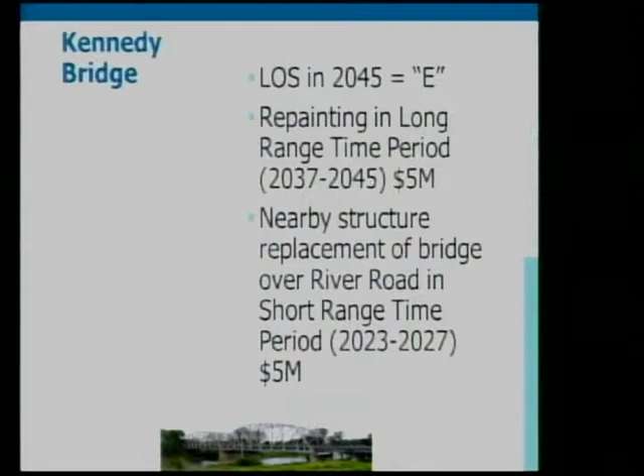We do have a nearby structure to the Kennedy, in East Grand Forks. If you drive over the Kennedy Bridge into East Grand Forks, there's the interchange with River Road, 4th Street. That bridge is scheduled for total replacement, projected to happen around 2026. That's also a $5 million replacement cost, with revenue identified and prioritized for it, so that project should happen given all other things remain the same.

The recent project done there made the decision not to add capacity, just to rehab, which left us with some capacity issues on that corridor. We're currently studying Gateway Drive, or US 2, specifically on the North Dakota side, because our traffic volumes are having issues there today, and projecting into the future, the capacity isn't there to meet demand. So on the Kennedy Bridge, even though the bridge itself will stay as it is, the roadways leading up to it on both sides have capacity issues today and will in the future. Tomorrow in this room, if you want to learn more about Gateway Drive, there's an open house specific to that study, at this same time, right here in this place.

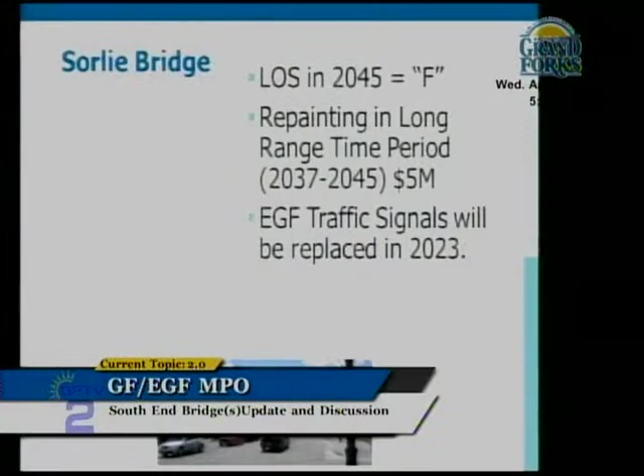For the Sorlie Bridge, or the downtown bridge, it also recently had a project done. There was an extensive review of the structure, and in the end, we actually had money programmed to replace it, but they decided all it needed was basic repainting and some minor work. That decision allows us not to revisit that structure for a long time. At the end of our 2045 timeframe, we have another similar project to the Kennedy Bridge occurring on the Sorlie Bridge — same project, same pricing, with money identified and set aside. We also have in East Grand Forks, in the future, total replacement of the traffic signals in downtown East Grand Forks, a project that will affect the Sorlie Bridge.

We know starting in May, Demers Avenue in Grand Forks will be totally reconstructed. The decision on that reconstruction was just to put back in place the capacity that's there today.

So both the Sorlie Bridge decision to just repaint and the Demers decision to just reconstruct what's there leaves us with capacity concerns, not just today, but more so into the future.

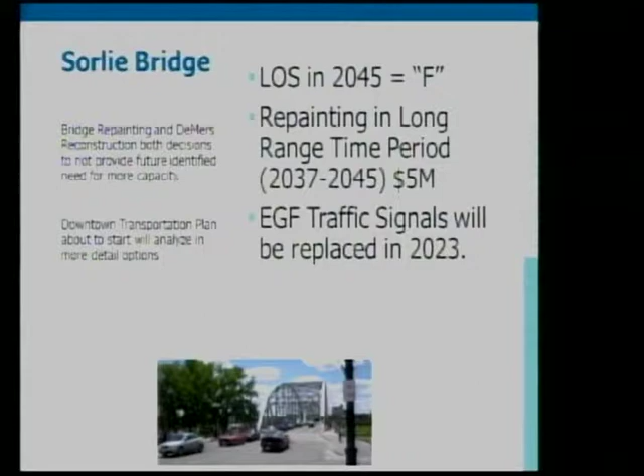The MPO is about to start a downtown transportation plan to help resolve those issues, and also work with the traffic signal replacement in East Grand Forks to help make the whole corridor of Demers Avenue in Grand Forks and East Grand Forks operate better.

The Point Bridge: more than 10 years ago, 14 years ago now, a decision was made to just basically repaint the Point Bridge and maintain it at the capacity that it provides. In the near term, there's another repainting job programmed in the plan to keep that bridge operational.

Back in that 2006 repainting project, they didn't have to do a traffic operations report for that type of project, but it did identify as one of the alternatives a replacement option. They didn't pursue that, but if they had pursued replacement, it would have meant added capacity would have had to be built to meet future demand.

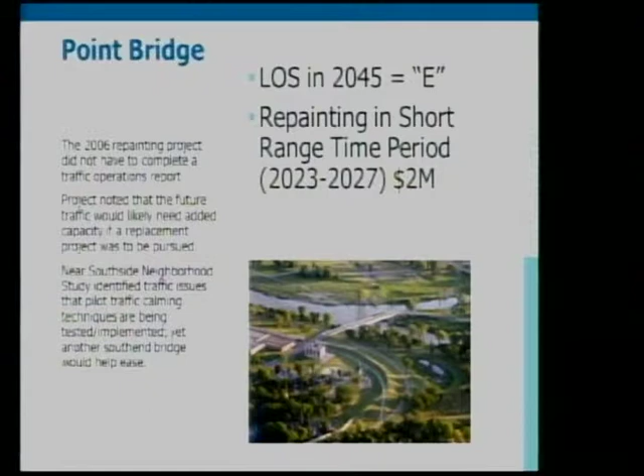That obviously didn't happen, and because there isn't another bridge to the south, the near south side neighborhood here in Grand Forks has been asking the city, and we've been working with the city on doing some traffic calming techniques, as you've seen on Reeves Drive in particular. While we can identify some benefits to the near south neighborhood with these techniques, another south end bridge would help much more for that neighborhood.

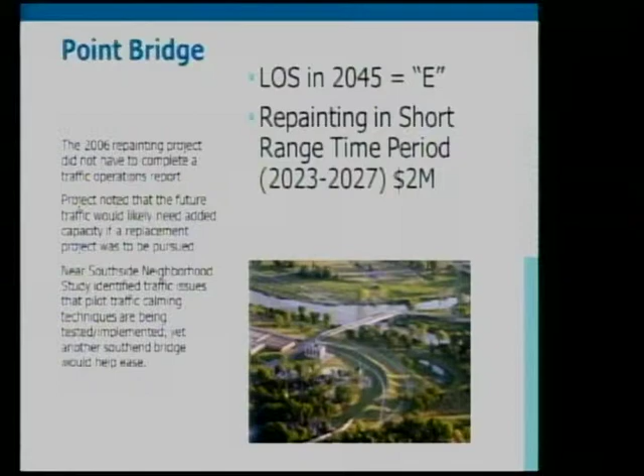So that's what's going on with the existing three structures. Even though we're not doing anything to add capacity to them, we've had projects recently done on them. We've also identified that there are capacity issues leading to and from all three of those bridges.

And we have started studies for the Kennedy and the Sorlie. For the Point Bridge, and the reason most of you are here, is that we felt the need to site another location to the south. Before I get to that, there is one project that we identified that we could not find funding for in the current plan, and that is on the Point Bridge.

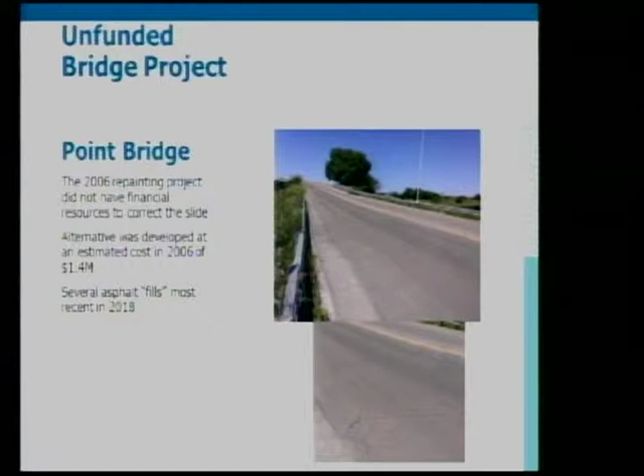At that time, it was $1.4 million, but there were no funds to do the project. So since then, they've been putting in asphalt fill to make that bump less noticeable, just last year they put in that fill again. But it is an unfunded project, meaning we identified the need, but we couldn't find revenue for it. And it's escalated now to about $4 million because of inflation.

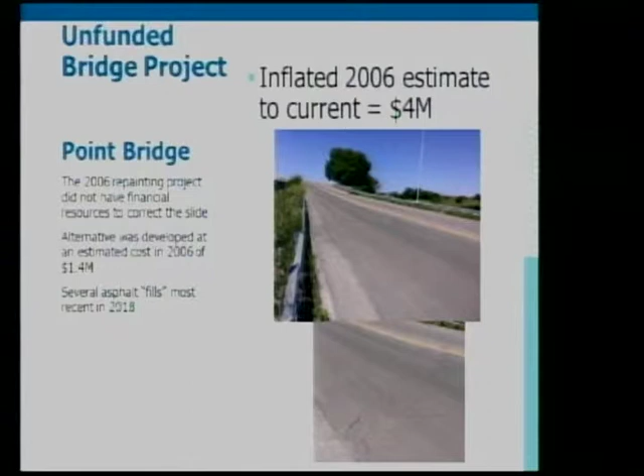So for the future river corridors, we have Appendix C in our documentation. It's a 171-page report that talks about how we went through the process of identifying if there were south end bridge locations, where we should study them, and what the data would tell us. I won't go through the whole 171-page report, but I will highlight some of the things that we did to come to the conclusions we did.

The first point is basically what I just told you: there are some existing issues on all 3 river crossings. In the future, they don't get better, they get worse without another south end bridge.

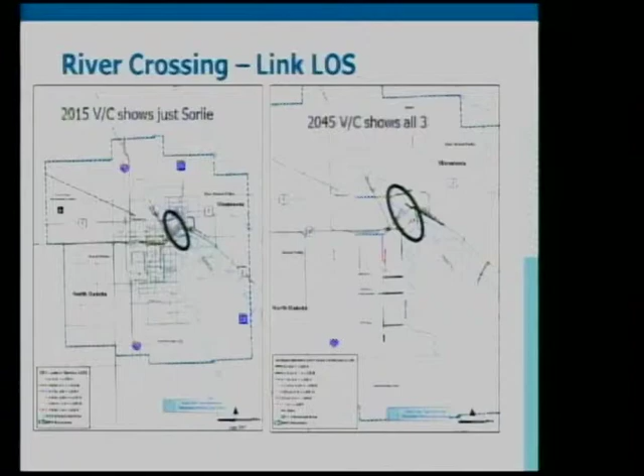This slide gives you level of service, hopefully we're all familiar with that, where we give roadways and intersections a letter grade just like you got in school. A is great, F is failing. You can see here that in 2045 we've got some intersections that are failing without that additional bridge, and some intersections at level E, which is also considered a failing grade.

Without another bridge, we identified what could be done, particularly at the 2 intersections that are F: Belmont and 4th Avenue, and Belmont and 32nd Avenue. So regardless of a bridge, we need to do traffic control improvements at those 2 intersections to solve the future traffic demand.

How do you get an F rating? Is that just because it's a 4-way stop and not a traffic light? Yeah, a 4-way stop can only handle so much traffic. And as you increase the cars, you have to go to a different traffic control.

Earl, I'm sure this is obvious, I just have to ask it though. If Belmont and 4th is rated an F, what's the rationale, in a sentence or two, why they would have taken the traffic light out at that intersection and made it a stop sign? Is that flow of traffic? Well, what happened with that traffic signal is somebody ran over one of the standards, and then ran over two of the standards.

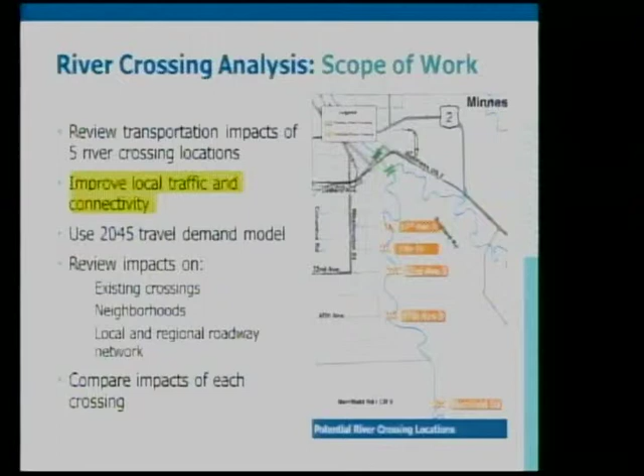We started out initially just looking at 17th Avenue. It was called 24th Avenue initially, but we more precisely picked Elks Drive. If you don't know where Elks Drive is, it's near 24th Avenue South, 32nd Avenue, 47th Avenue, and Merrifield Road. These are all Grand Forks reference locations, because over in Minnesota there just aren't roads necessarily on the other side.

How did we think these bridges would look? Again, because they're serving local traffic, we modeled the Point Bridge as a bridge of similar characteristics. You'll notice there's one lane in each direction. When the Point Bridge was built, they didn't have design standards that required shoulders, so we would now have to show shoulders. When the Point Bridge was built, they also didn't have the demand or requirement of a multi-use access point, so we modeled that.

So this is a cross-section of what the bridges for all 5 locations were, making sure we were doing an apples-to-apples comparison on all locations. The other thing we did to make sure it served local traffic is that we only connected to the nearest north-south roadway in either city. We did not add any new connections to I-29 to the west or to US 2 east of East Grand Forks.

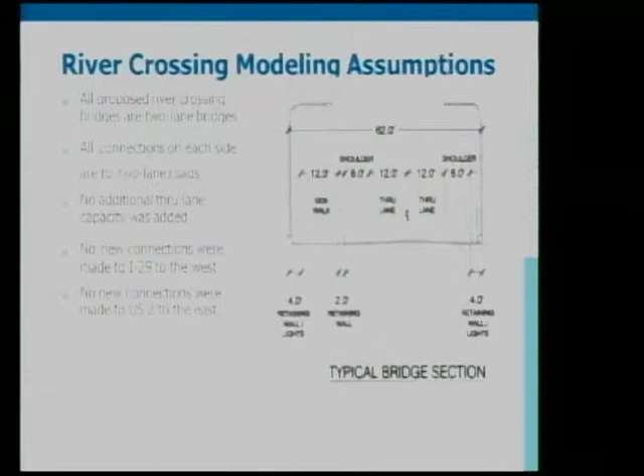Because again, our mission was to find a location that served that local traffic need. We have a traffic demand model that we use as one of our tools to help identify not only what traffic issues exist today, but from the federal, state, and local government points of view, we want to make sure what we invest in today solves today's problem but also lasts at least 20 years into the future.

So we have to forecast what we think traffic will be in 2045 in this case. Using our travel demand model, we identify what the traffic is today, that's the top number. The middle number is 2045 without another bridge to the south. The bottom number is what the traffic changes to if we build one to the south. This shows 32nd Avenue, and we've located a few key points in the network showing how we predict traffic will change if we did a bridge here. We did this analysis for all 5 sites.

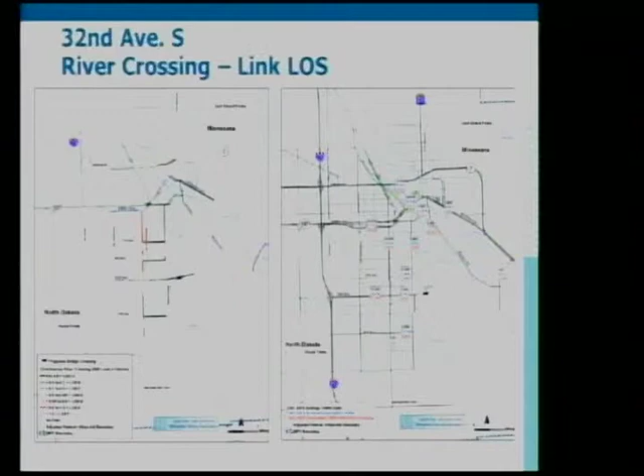So to try to give some idea of what that local traffic impact is versus what a regional traffic attraction that bridge might be, we initially chose 2 points. The first is out here on the Mallory Bridge over the Red Lake River east of East Grand Forks, which gave us some sense of the regional traffic pull. We also looked at traffic on Bygland Road in East Grand Forks.

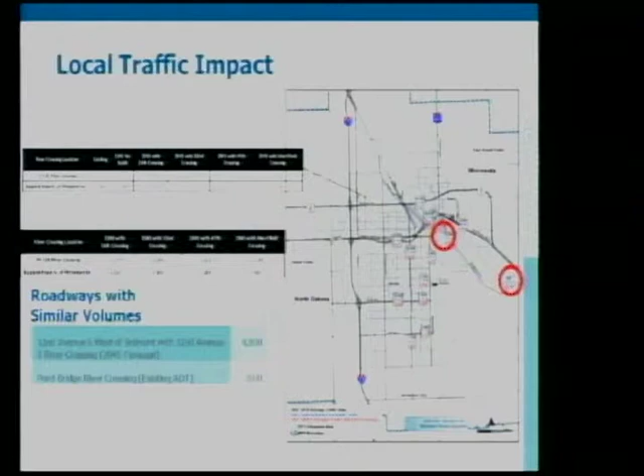This slide shows, in our model, we do what's called a select link. So when we put a bridge, this happens to be the Elks Drive Bridge, we ask the model to track every vehicle that crosses it, tell us where it came from or where it's going. We compared it versus the other model, showing us where traffic was taken away from. With a new bridge, it attracts traffic that already exists in the model, so the model can tell us where that traffic is coming from.

The reason I put this example up is that on the North Dakota side, it enters a T intersection, and the traffic gets split amongst several neighborhoods. The red shows that Park Drive would have an increase in traffic in front of its houses with the bridge at Elks. 17th or 24th Avenue would as well, and 32nd Avenue would as well.

Belmont Road would, and a small segment of 17th or 13th Avenue would. All the other crossings, because they went directly into an arterial roadway, stayed on that arterial roadway. But this was one example, trying to show you that our model was able to give us some sense of where traffic was coming.

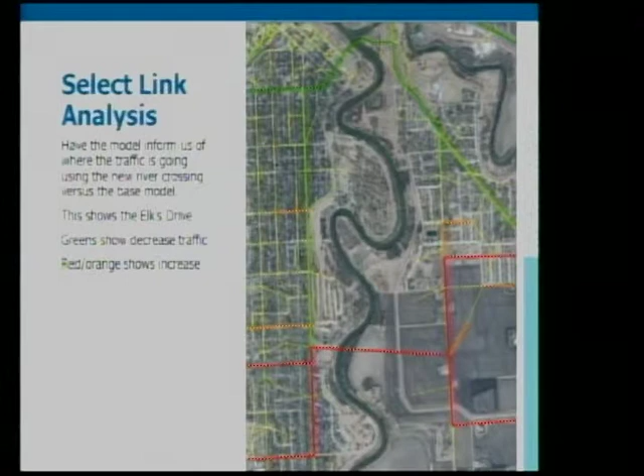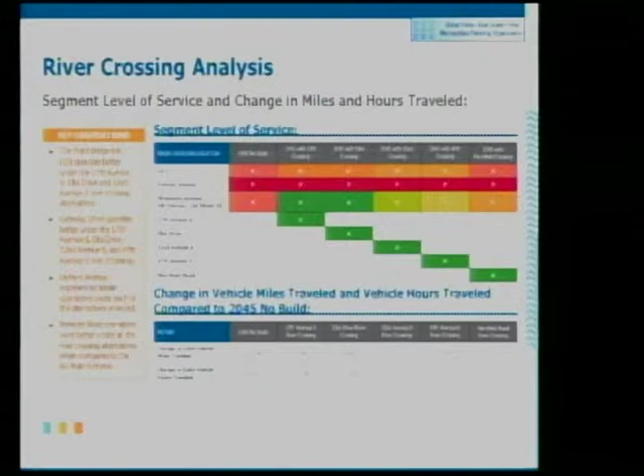Another way of showing that impact is here in the lower right, the change in traffic volume on the Mallory Bridge over the Red Lake River. You see as you go further south, it attracts more regional traffic, if you will, than if you're at the northern locations.

Over here, it shows the opposite. This happens to be on Bygland Road in East Grand Forks. And you can see the further north you are, the more local traffic it is providing.

Two other spots that we look at. Here is Point Bridge itself, Minnesota Avenue just west of the Point Bridge. Again, the more north you are, the more local traffic it is. The further south you are, the less local it is. Less local here, more regional here as the further south you go.

Here is at 17th Belmont Road at 17th Avenue South. Again, further north, more local traffic; south, less.

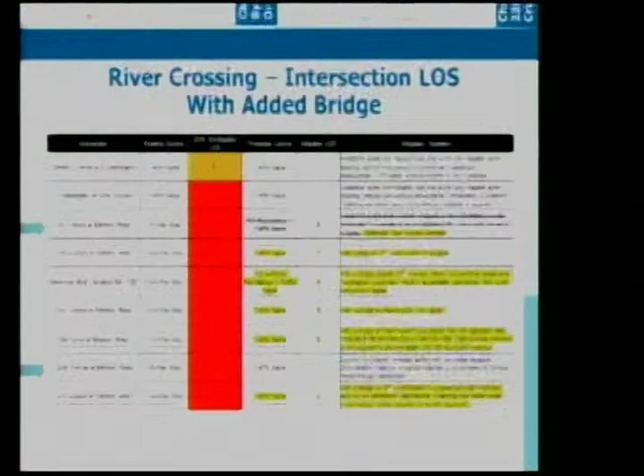So this gets back to your question about what the future level of service will be. If we locate a bridge at Merrifield, we'll have a level of service B at Belmont and 4th. At 32nd and Belmont, if you locate a bridge at 32nd Avenue...

Here we identified traffic signal, and I've since said to people I probably should not identify that specifically as a traffic signal. Five years ago that probably would've been a more definitive answer, but nowadays we have alternative intersection designs, roundabouts as a possibility, so there would need to be a different traffic control there regardless of the bridge. But if the bridge was there, it could be the same traffic control, and we would get level of service C, an acceptable level of service C.

So does that show that 47th is actually better than it is if you had the bridge at 47th Avenue? At 47th Avenue, this shows that the intersection of 47th and Belmont with a traffic signal could be a level of service B, which is higher than a C.

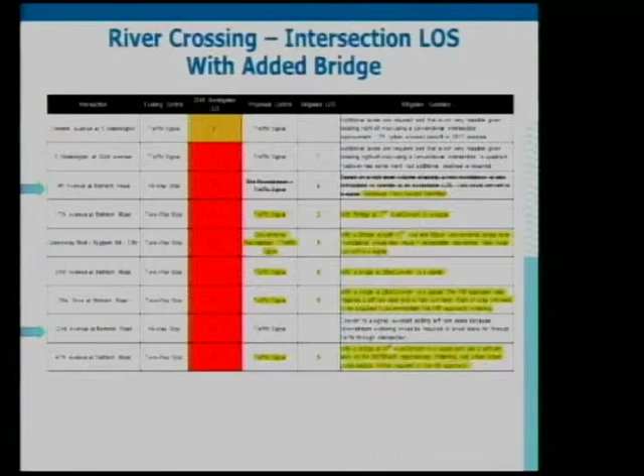Yes. You currently rate 32nd... because it attracts less traffic. There's less traffic at 47th than at 32nd. So that's the result of the level of service grade.

You currently rate 32nd and Belmont in the future as an F without the added bridge, correct? Correct. In that previous slide? Yes. So by adding 4,000 cars, you're going to move it to a C?

At Belmont and 4th, if we add a bridge to the south, the traffic is essentially very similar to what it is today. Without a bridge to the south, the traffic will build up to 12,000 cars a day on that roadway. My question was Belmont and 32nd, you currently have rated as an F.

Without an added bridge? Yep. You have the 4th and the 32nd as both Fs. Now with the additional cars, you're saying it's going to move from an F to a C? With the improved traffic control.

Just like this is able to get better without a bridge with improved traffic control. Both are all-way stops. I also had a question. If Grand Forks gets to the point where they can't replace a stoplight on 4th Avenue South, where does that come from? Why can't they replace that stoplight? Would the same thing happen on 32nd? If somebody ran in and knocked the stop sign over, would they not replace it, or would they just put the stop sign back up?

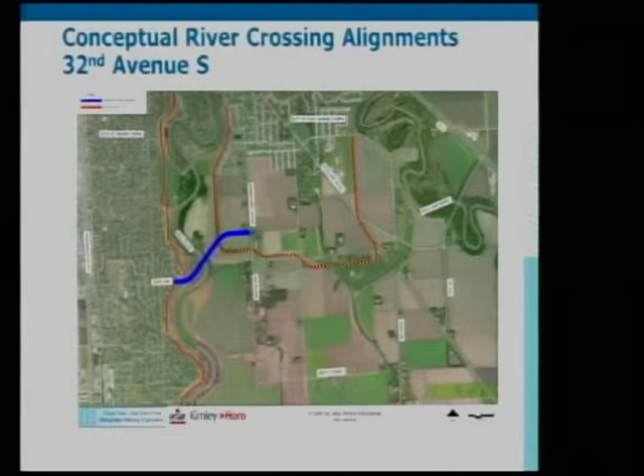Because of the flood protection system and the criteria for getting permits to cross or impede it, and also the cost, well I'm going wrong, sorry. The cost to have a structure from top of dike to top of dike triples the cost. We were identifying a bridge where the bridge itself would be high, but the approaches would be floodable, which allows it to be permitted within the flood protection system.

Just like the 2 new bridges were put in place as part of the flood protection system, would this bridge have to close during the spring like the Sorlie Bridge is right now, or would it be high enough up to remain open even during high water levels? It would be subject to closure, just like the Point Bridge is subject to closure.

So, does it go over the Greenway path, is it crossing that, or is the bridge going over all that? The structure here is the dike itself. Most of the Greenway Trail system is located very close to the dike structure, so the bridge is over the main water body of the river.

So unless, as part of the construction, they built a grade separated trail crossing, it would be at grade, just like it is at the Point Bridge on the Grand Forks side, on the dike structure, the opening in the dike structure there at 3rd Street and Minnesota.

So I guess, when it's coming on the Grand Forks side, is it going to be crossing the Greenway Path? Yes, it would be crossing, acting a lot like Elks Drive currently acts in the Greenway system. Elks Drive gets you into the golf course clubhouse, so 32nd Avenue would open through the dike and get you to the bridge.

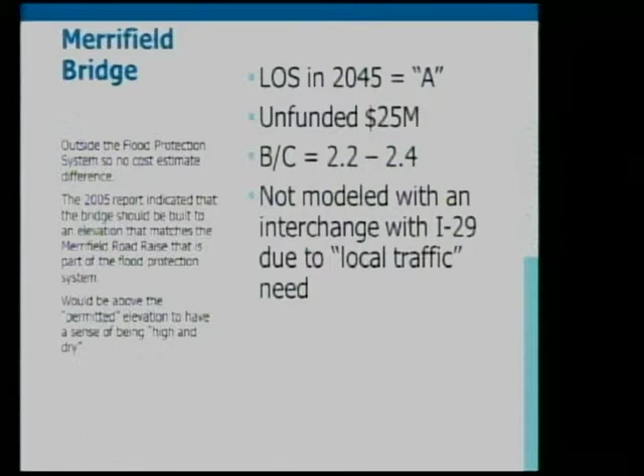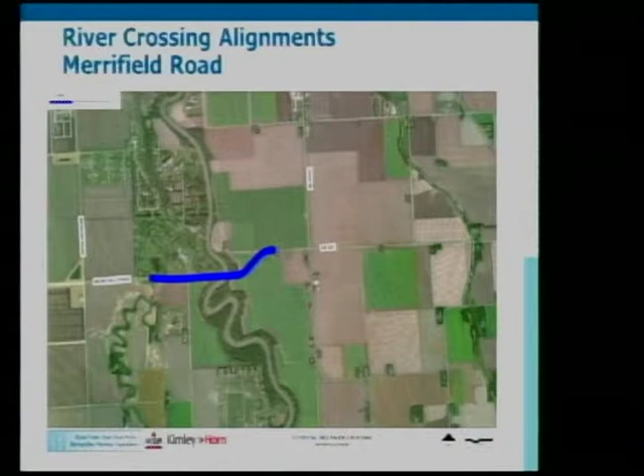Not even today's flood, not even the 2009 flood, but to the design flood event that the flood protection project is. So in our study, we just had this conceptual alignment for Merrifield. Here is Polk County 58. Here is Grand Forks County 6. It ties in nicely with the county system.

But in that report, we went to the next step, and that was to answer some of these questions more about precise alignment. We looked at alignment alternatives. We looked at endangered species, so part of the NEPA Act, we went and analyzed places to avoid because of protection. We also looked at the hydrological profile, so that's where we know at the design height it would be high and dry.

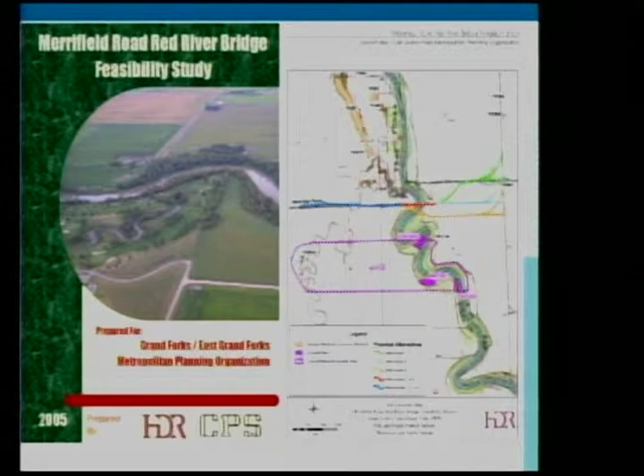So when you give the estimate of $25 million, this structure is intended to serve as that structure that would be built that wouldn't close, in addition to the Kennedy Bridge, which wouldn't close. But because of costs, we're able to do it here because it isn't officially tying into a flood project on both sides of the river. It's complementary to the flood project, but it's outside of the flood project. So again, that's why one bridge is high and dry, $25 million. The other bridge is floodable, because it makes the cost manageable.

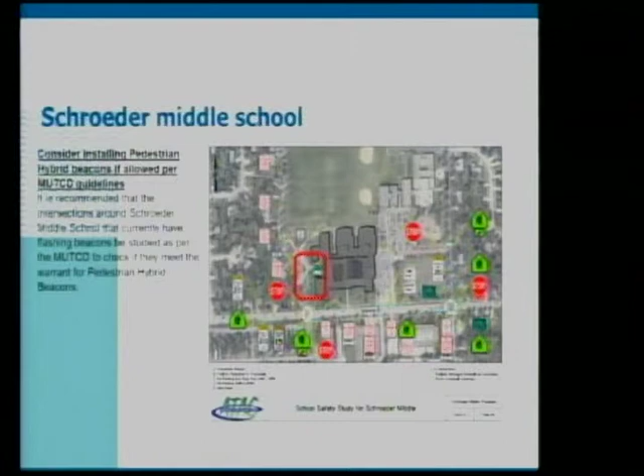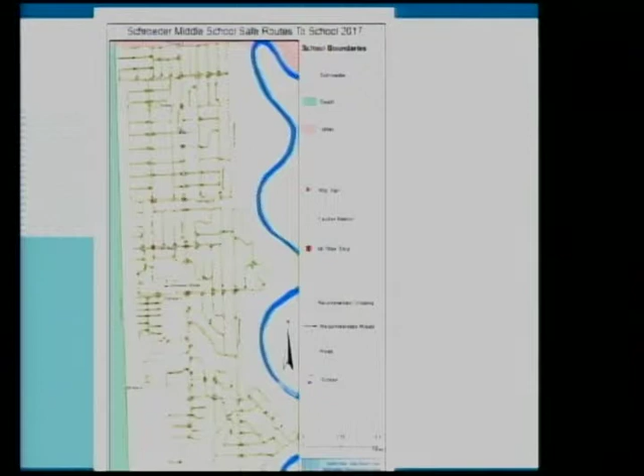Annually, we work with both school districts, Safe Kids, and others to produce safe route maps, to let your child, and you, know from our perspective which is the best route for them to walk or bike to school. We actively work with the school districts and both cities, have been, and I anticipate we always will be working to improve school transportation in Grand Forks and East Grand Forks.

You will start seeing, or should have already seen, some investments in the past, and you'll start noticing a new investment as part of this work: the change-out of the school crossing beacon signs. Right now they all flash at set times regardless of whether school is in session. They'll be upgraded so they are timed correctly for when school is in session, and turned off when it's not. They'll be pedestrian-actuated, so if somebody wants to cross during a non-school time, they can activate the signal so the crossing can occur and the flashing lights come on.

So we do work on school safety. When we talk about bridges, we have that in mind, with or without a bridge. So thank you, thank you very much.